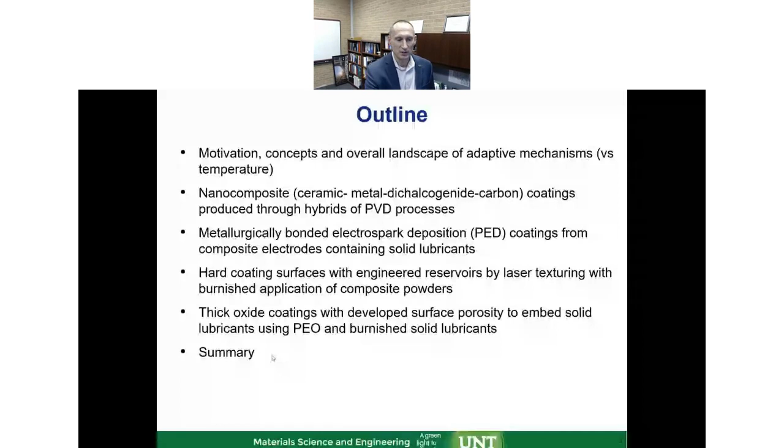Starting with the motivation, why do we need adaptive materials in tribology? Well, for people working in the industry, this is known better than anyone: machines have to operate in multiple operating environments. Aerospace, of course, can be extreme, but in tool industry and automotive, we always encounter conditions where you have to operate across multiple temperature ranges, multiple environments, high and low humidities, maybe some gases, as well as load and speed conditions, which leads to the challenge of how you pick the best tribological material. Specifically I'll be focusing on solid lubrication.

So when there's no liquid available, maybe at high temperature or other conditions, how do you pick the material? I like to use this chart, just to highlight that there are major groups here, and these are just examples. I like this chart because it clearly shows there's no one material which can work adequately well for any one of these environments. I put in humid air, dry nitrogen, vacuum, and 500 C air. Take molybdenum disulfide as an example: great for vacuum and dry nitrogen, very low friction, long endurance. As soon as you go to 350 C in air, it's oxidizing and failing.

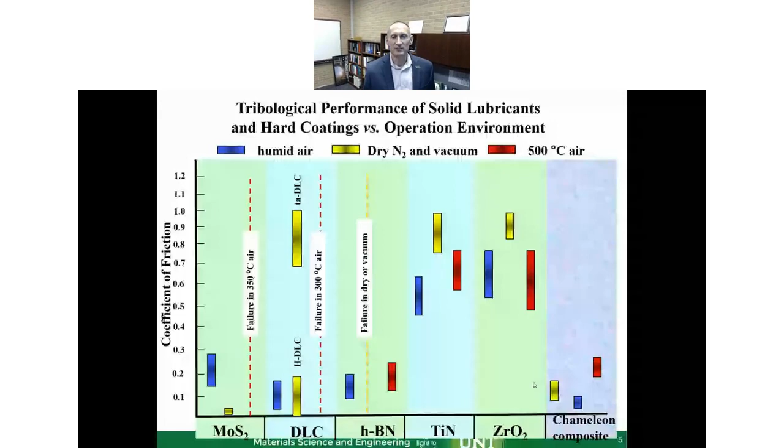And then the story repeats for any other material shown in here. We also have a group of hard coatings which are wear resistant but have high friction coefficients, so we'd like to be in here. And the answer is normally: okay, well, let's combine this together so they can work. The trick is then to make sure that on the surface during operation you have the right material, which comes to that chameleon concept, which I was working with my colleagues for many years trying to advocate.

That's the idea for adaptive lubrication. Basically, we want to engineer our coatings and our friction pair—sometimes we also need consideration of the counterpart and environment—so that in any conditions, reactions going on, whether temperature induced or friction induced, will end up forming the favorite material for lubrication. So we have the lowest friction material possible in the wear track in any condition. And if the condition changes, we want our material to adapt and change the surface in terms of chemistry, composition, and structure, so we have the right material that can provide low friction.

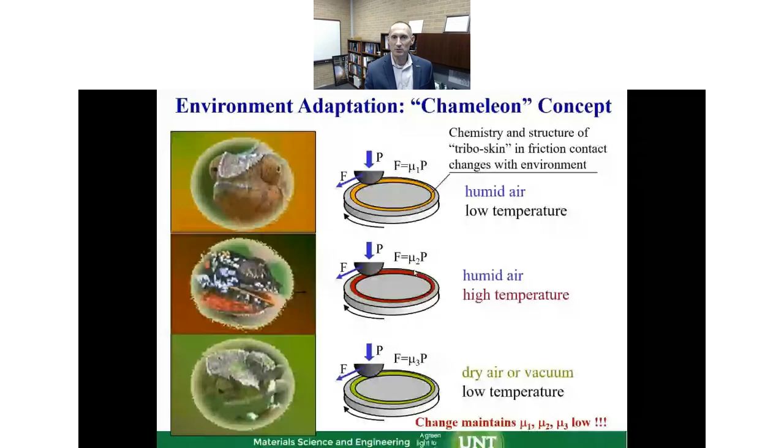All right, so this is kind of the concept. How can we do that? Well, we need to come up with the mechanism for how the materials can adapt, and what types of things we can use. So over the years, multiple mechanisms came out, and I'm sorting them out in this table, going by temperature, from low temperature all the way to 1000°C.

I will go through that today using examples. We'll talk about hexagonal solids such as transitional metal dichalcogenides and evolutions there. I probably, because of time, will skip the fullerenes and some other closed shell structures, which can buy additional capability, perhaps 100°C, because of the closed edges.

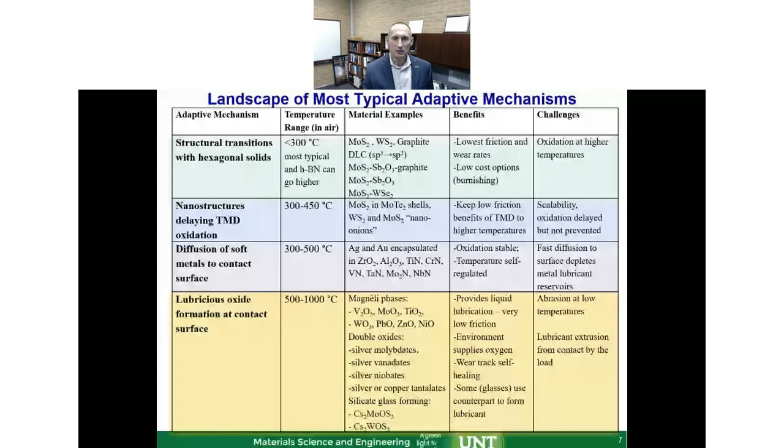I will highlight use of metals, which relies on softening and diffusion, and also highlight the high temperature end on oxides, where you specifically look at Magnéli phases and other binary oxides for lubrication. Those are mechanisms of complete adaptation, and we can talk about how we realize them using different techniques.

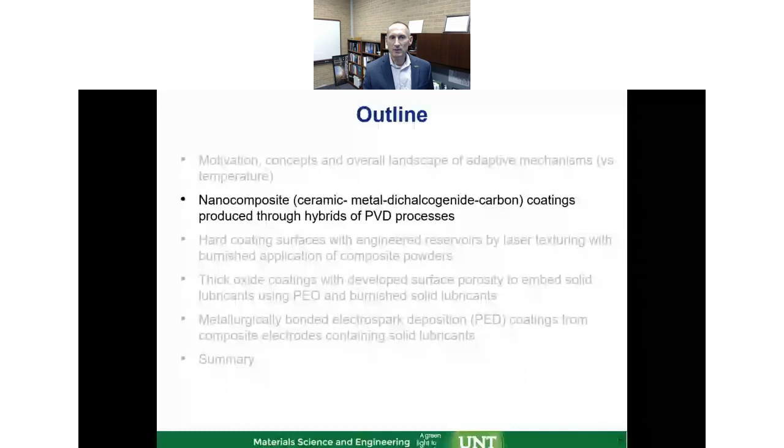All right, so let's talk about the first group of technologies: nano-composite coatings using PVD. I'll use this to highlight some of these mechanisms before showing other examples. One of the first successes we had in our group developing this type of material targeted the environmental change between humid and ambient conditions, where we have oxygen and air present, versus dry and vacuum conditions.

You can think about it as being between the Earth and, say, satellite use. People who design satellites always need something like this because you test on the ground first, and then once you launch, you operate in a vacuum environment. So you have at least one cycle, sometimes more, depending on how you test those things.

One of the materials we worked on at that time combined hard phases based on carbides with carbon materials such as DLC or fluorinated carbon for lubrication in a humid environment. We can also add molybdenum disulfide and tungsten disulfide for lubrication in a vacuum environment. It worked fairly well—I'll show you the example.

The challenge was how to get it to high temperature. What if you also need temperature cycling or a temperature rise? This is fairly challenging because we involve oxide formations and unrecoverable reactions at the surface, so you need to start thinking about those things.

In all of these designs, it's very crucial—and this is something I want to highlight—that you not only think about what's happening with the chameleon adaptation, but you need adequate load support, because you want your tribofilm to always be very thin and laying down on a hard supporting layer. This is something we all know from tribology books, and for many years people such as Alan Matthews and Ken Holmberg were advocating for this type of surface engineering. Don't forget about adhesion, because if nothing sticks to the substrate, especially during temperature cycling, that's not going to work.

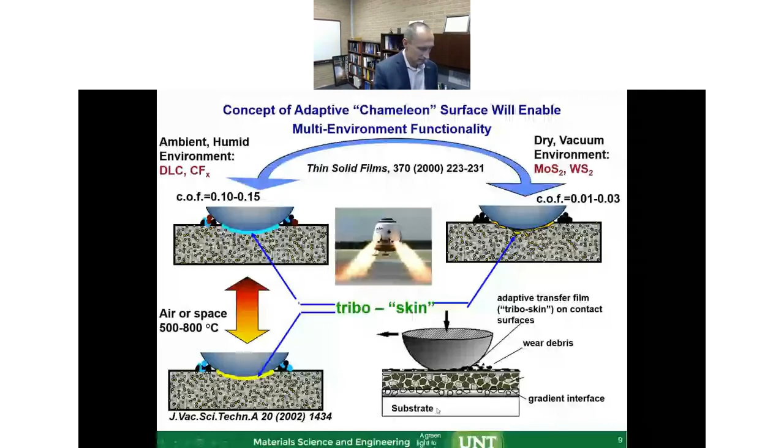All right, so let me move on. That's how we make those materials, the composites and the PVD coatings. We use a number of techniques, and I'm showing them in this chart, giving an example of some of the PVD tools we have available to us.

I listed here, highlighted in blue, the energies of the incoming deposited fluxes. This is something we use in PVD to our advantage. The reason is, when we combine multiple materials together, based on thermodynamics, their energies of formation are different. So if we only rely on substrate temperature, we run into a big problem, because some materials require high temperature synthesis, such as carbides or some of those oxides I will show.

And others cannot tolerate the high temperature. So carbon-based materials, or to some degree chalcogenides, will require a reduced temperature.

To overcome that, we're using high energy fluxes and these techniques. For example, in magnetron sputtering you can have a regular option, or a HiPIMS option, which can bump up the energy of the incoming flux by an order of magnitude. This compensates for the low temperature and drives the formation of normally high-temperature phases at reduced temperatures.

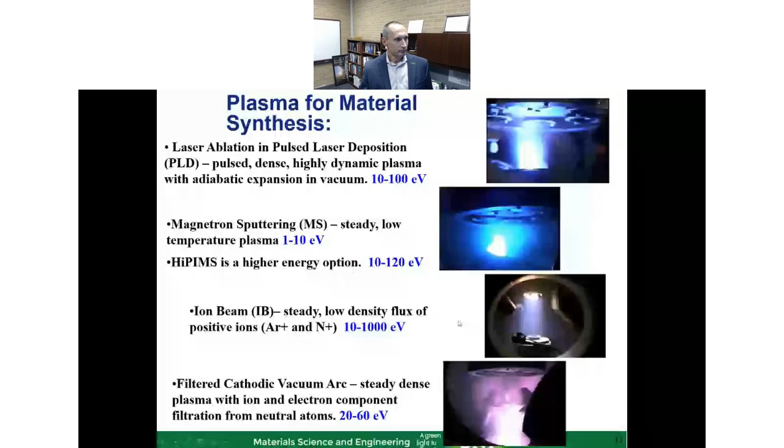All right, let's move on. So we want to combine this here, and one example I've worked on before is a combination of sputtering and pulsed laser deposition. You see the movie: the laser strikes on the bottom, the plume comes up, and the sputtering is on the sides.

Out of this arrangement, we have a combination of relatively high energy flux coming off the target, which is zirconium oxide, molybdenum disulfide, and graphite, and relatively low energy flux coming from the magnetron, which in this case provides gold as a component of the coating. In that movie, you can also have multiple magnetrons, or replace the PLD with an arc evaporation source, and have all the different combinations available — that's what we actually use.

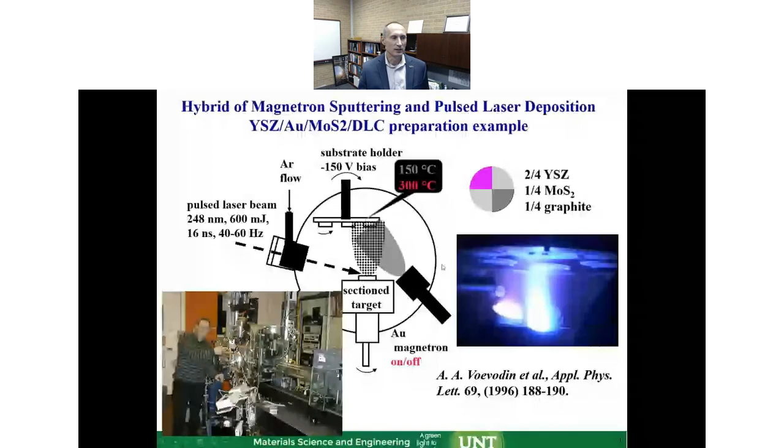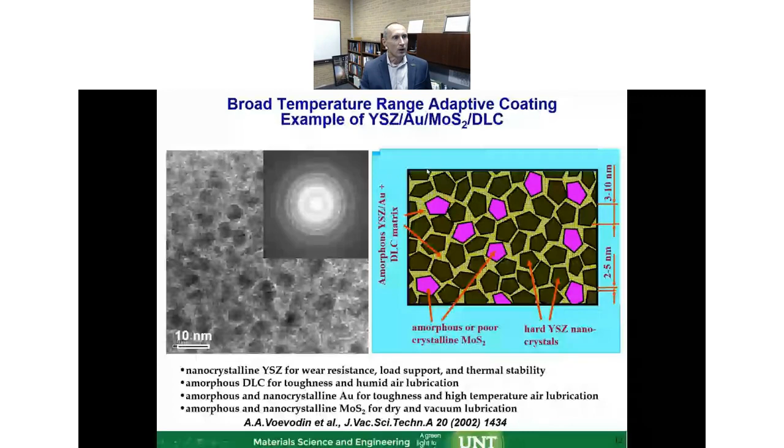This is the design for this material, which is ready to adapt and work in multiple environments. I'll show some examples over the presentation, but first let me focus on the low temperature performance of these adaptive coatings.

In this regard, let's look at the mechanisms we can use at 300°C and below. Here we talk about the chalcogenides and graphite — hexagonal boron nitride is somewhat of an exception because it can go to much higher temperatures. But let's focus on this range and the mechanisms involved.

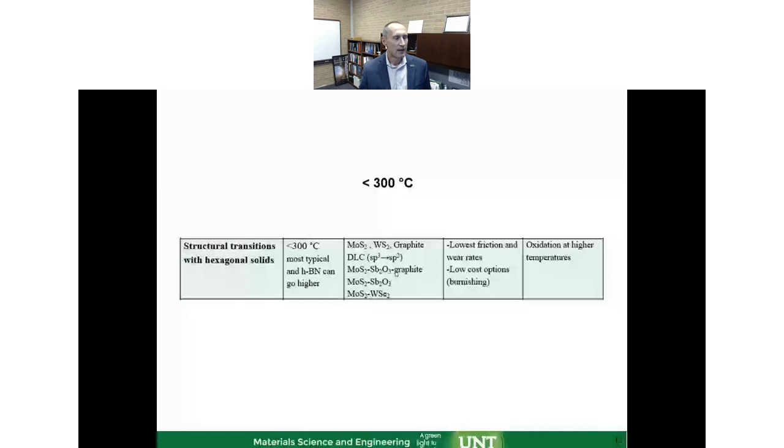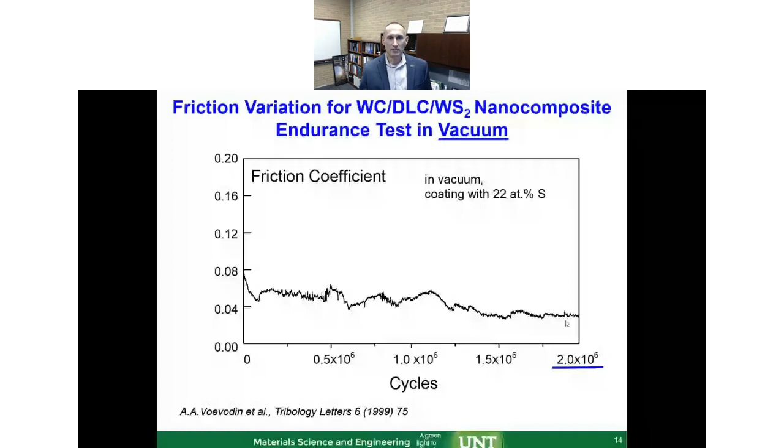So what's happening in terms of mechanism? There is tribofilm formation. This is from our own results, but I also have confirmation from other research groups, including the group of Dmitry Shtansky at the Moscow Steel and Alloy Institute.

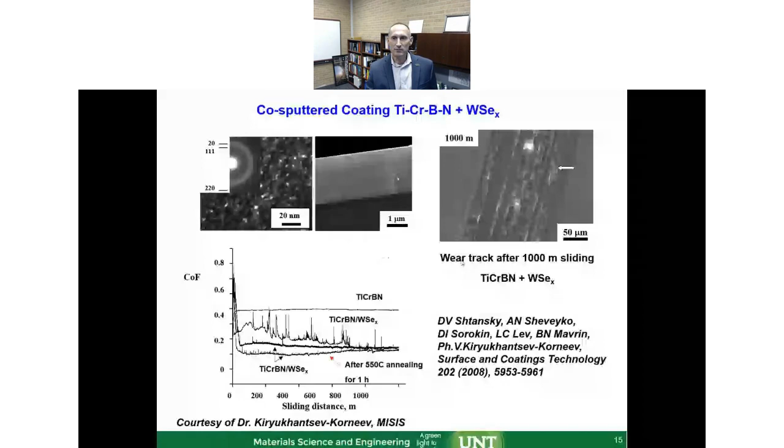All right, so let's look at the transfer film in much more detail.

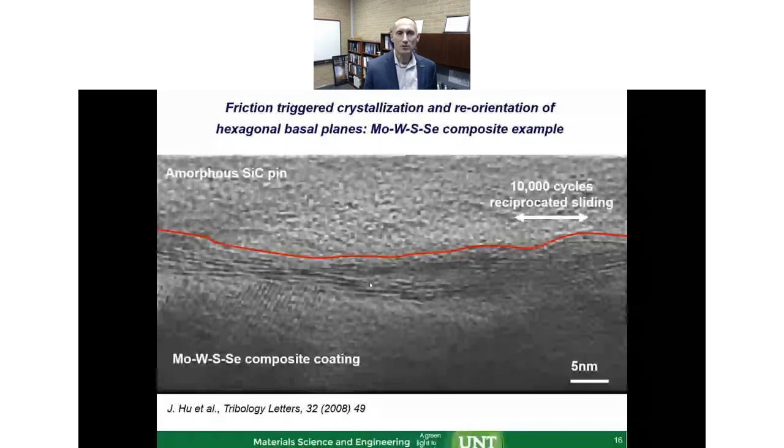And this is over 10,000 sliding cycles. After that, there's pretty much no wear, because of the reorientation of the randomly oriented grains, and the amorphous grains transform into the crystalline hexagonal phase. This is the adaptive mechanism for this chalcogenide, which is well known, and this is confirmation of how you can see it in real life.

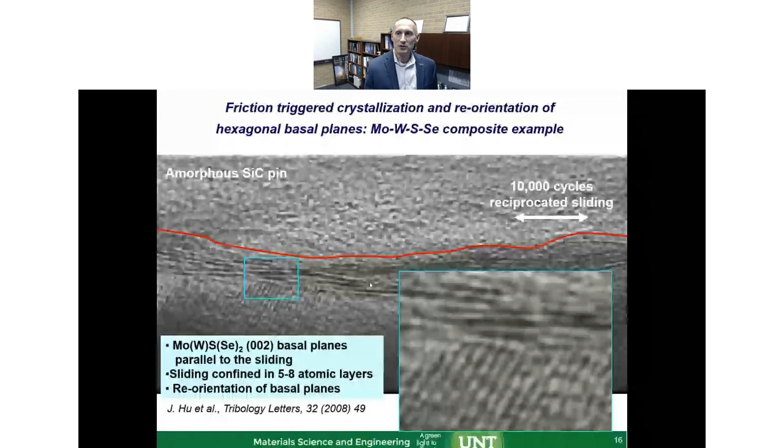All right, let me move on here to some demonstration of how this gets used. One of the very interesting and cool tests we did was with University of Florida, Greg Sawyer, Brandon Krick, and others, and Tribologix, who provided some of these coatings.

Air Force Research Laboratory, where I was working at the time, was doing the experiment for MISSE on the space station. To our knowledge, it was the only tribological in-situ test performed in orbit.

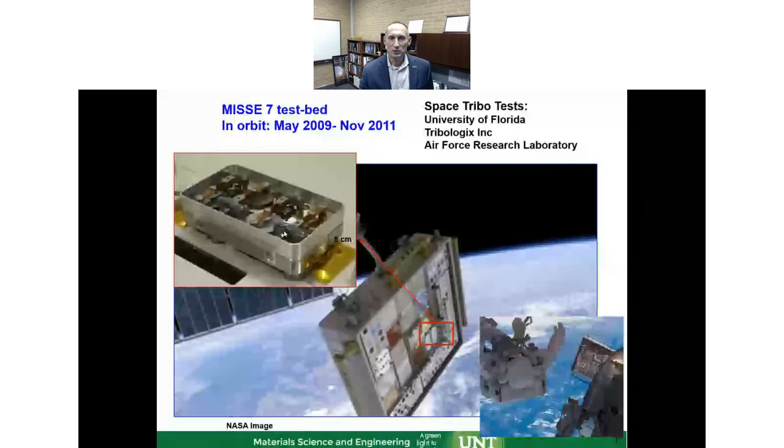What you see here are actually tribometers made in boxes, which the astronauts took out and put outside of the space station, in front and in back, for different exposure. They were left there while the tribometers worked and telemetered the data back to the ground, so we could see the friction coefficient in situ as it went around the globe. It was in orbit for this duration, a little longer than we expected. When it came back, we had the ability to analyze and compare before the flight and after the flight.

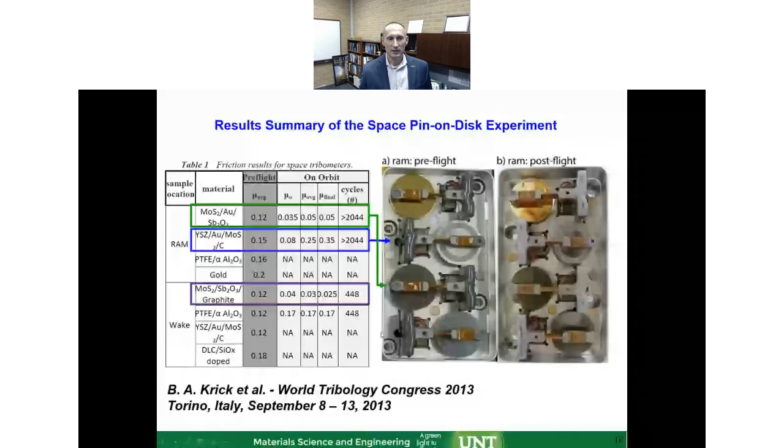We had a number of coatings there, including these chameleon coatings shown here, and the chameleon coating showed excellent performance across this space test. This was one of the things engineers in aerospace always ask: was it flown in space? And we can answer, yes, it was flown in space. It showed very good results compared to some of the baselines, and this is how you get it space qualified. Brandon Krick presented these results at the World Tribology Congress in 2013.

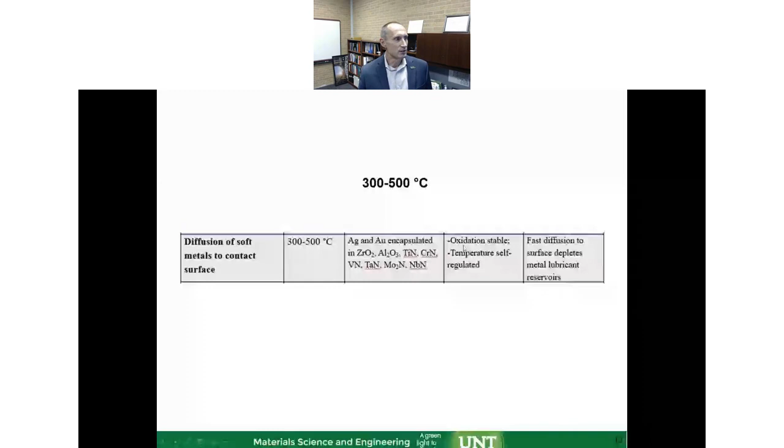Let me move now to the 300-500 degrees C range mechanism, where we talk about metals, because the chalcogenide will be oxidizing and won't really survive at this type of temperature. As I mentioned, maybe fullerene structures can extend it, but in general we now have to use different mechanisms. One of the mechanisms we can use is gold and silver encapsulated in matrices.

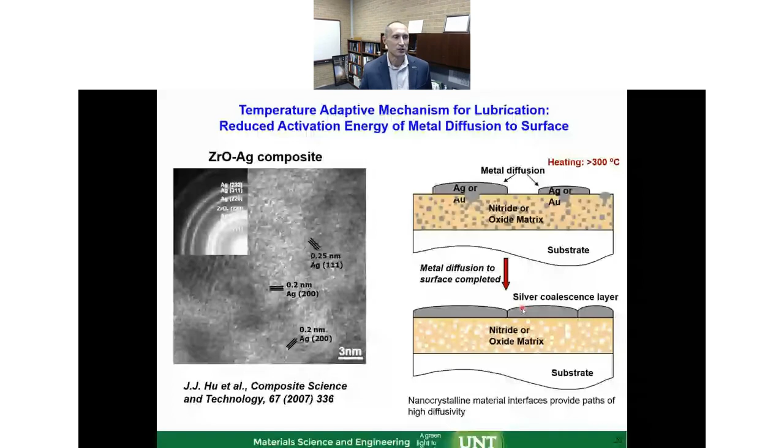This is an interesting concept: you take one of these temperature-stable oxides, such as zirconium oxide, or you can use nitrides, I'll show an example of nitrides too, and put the soft metals there, distributed between the grain boundaries, or even in the crystal lattice itself, in defective sites. Once you heat it, they are driven by surface energy minimization out of these oxides to the surface, and they coalesce there. Because they're soft, and because the temperature is now more than 300 C, they soften further and provide good lubrication in that condition.

So to show you an example here, this is with zirconium oxide and gold, pardon, this should be silver. You can see here the gold part, the gold grains showing up on the surface, and they are smeared, of course, in the tribological track, providing this lubrication shown here.

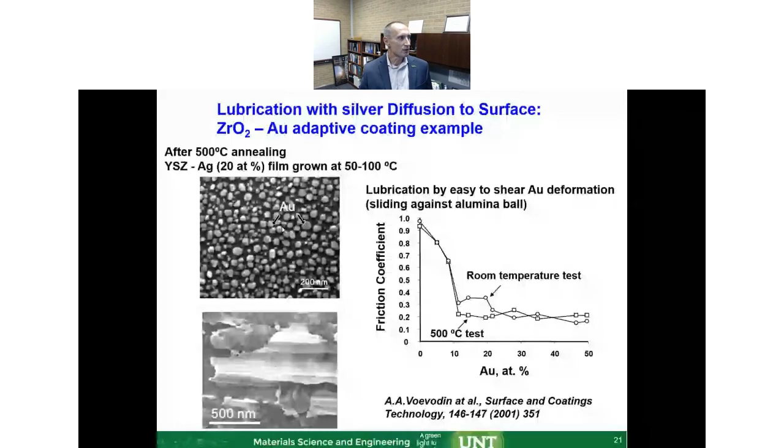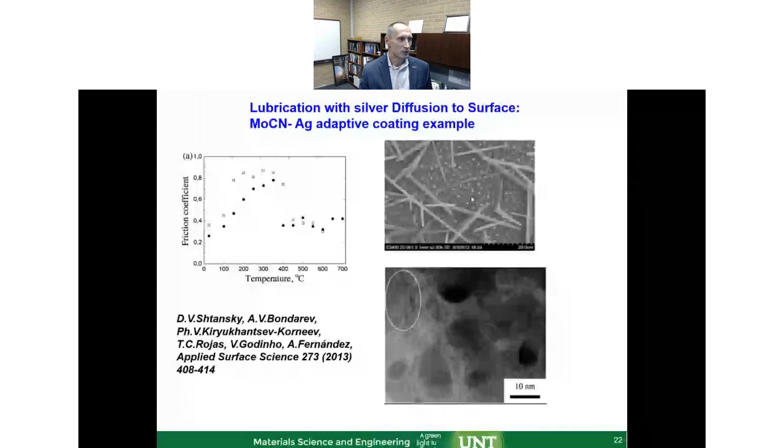That concept is equally applied if you replace the zirconia for a different matrix and replace gold for silver. This is, for example, work by Dmitry Shtansky again from the Moscow Institute of Steel and Alloys, where they're using a molybdenum carbonitride coating with silver as an addition. You can see here, right around 400 C, the mechanism gets triggered, and the silver comes up on the surface and provides friction reduction, very similar to what was shown in the previous chart. So it's working very nicely from that perspective.

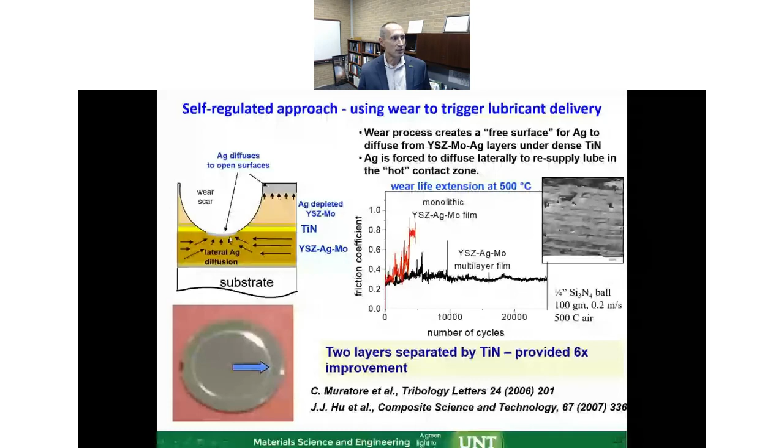The problem with that mechanism is that it diffuses sometimes too fast, especially as temperature increases toward 500 C—the diffusion is so fast that all the material gets depleted very quickly on the surface. So one way to address that is to put a diffusion barrier layer, such as titanium nitride, which will restrict the diffusion. Just putting in this titanium nitride diffusion barrier layer, splitting it in half, gives us an extension of wear life for many thousands more sliding cycles, because it restricts the diffusion toward just the wear track needed, using this subsurface diffusion mechanism.

All right, so now we've done this. Of course, you can also do more engineering—get more of these layers with diffusion barrier separation—and now you can start talking about thermal cycling, or at least a few thermal cycles available, and try to maintain the friction coefficient low as you go between, in this case, 500 and 25 C, through this adaptive mechanism.

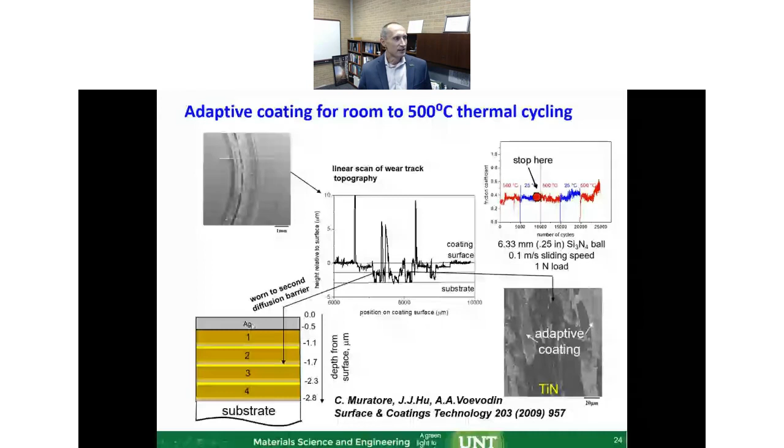Now we're covering low temperature and mid temperature. Let's go to the high temperature. If we go higher than 500 C, the silver will get out very quickly, even with diffusion barriers, and we need something else. Now we're moving into the world of oxides. At 500 C in air, the chalcogenides, carbon, or even the soft metals become too soft to work, so they're not a very enduring mechanism. So we need the oxide-based chemistry working, because then we're not fighting nature—oxide naturally forms.

So the trick is how we can guide this oxide formation to the ones we need. Which ones do we need? Well, we want ones that are stable at this temperature and have low friction—meaning low shear, or low shear modulus, oxides. Magnéli phases or defective oxides, like vanadium pentoxide or molybdenum trioxide, some listed here, are among the choices. People working in the tool industry well know the benefit of adding vanadium to hard coatings from that perspective.

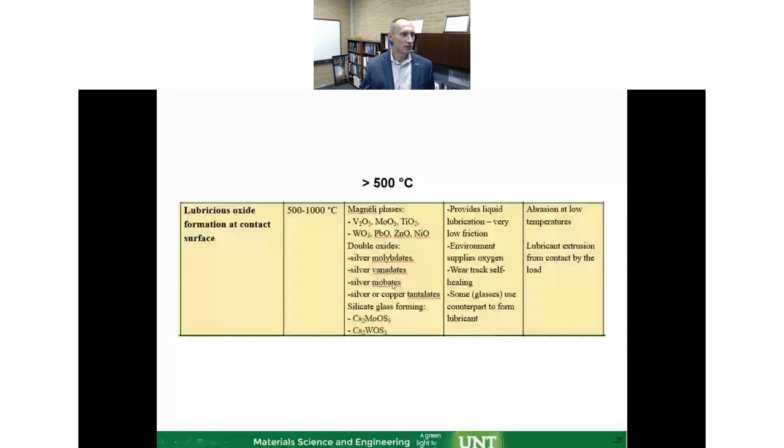Then you can look at double oxides, which can help reduce the temperature at which these mechanisms get tripped. Here we can also rely on modeling tools to help us, because that material domain space became very large very quickly, with multiple transition metals and oxide structures available, and now adding double oxides extends it even further. This is work from my good collaborator and friend in Aachen, Jochen Schneider, working with Tom Reeswinkel and Dennis Music.

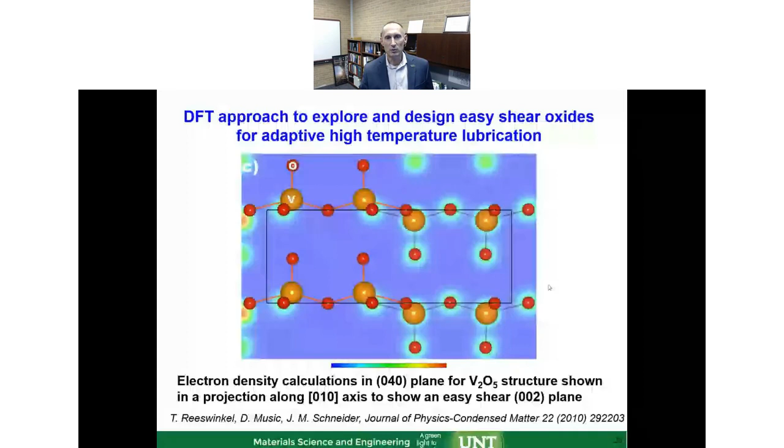In 2010 we did calculations on some of these double oxides, trying to locate the low shear modulus directions in these oxides that lead to lubrication. We looked at the electron density populations, trying to identify where this electron density is lower, along which planes, which can then lead to calculations of cohesive energy, leading to shear modulus estimations and understanding which ones can provide lubrication.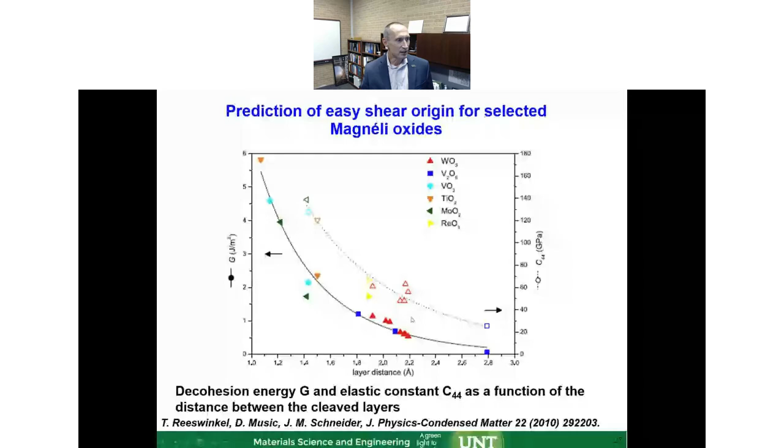So the results are shown here. The graph shows, for example, the decohesion energy and the C44 term—basically the shear modulus on one side and the cohesion on the other. These are different oxides that were run, and the winner here, in terms of lowest possible shear modulus, is vanadium pentoxide. Well, we already knew that from the tool industry, but this showed us that yes, we can use these tools and look at all these other mechanisms and predict it.

To take it further, because that was 2010, this was pushed further, and this is work coming out of another good friend and long-time collaborator of mine, Dr.

Samir Aouadi, who is at University of North Texas, worked with me. He's also working with a very brilliant grad student, now a brilliant engineer at General Electric, Darcy Stone. They looked into double oxides.

Silver vanadate is one example here, along with silver molybdates. We did calculations, looking at energies and electron distributions, and also at where metallic bonding exists rather than covalent or ionic bonding, so you can identify this type of oxide.

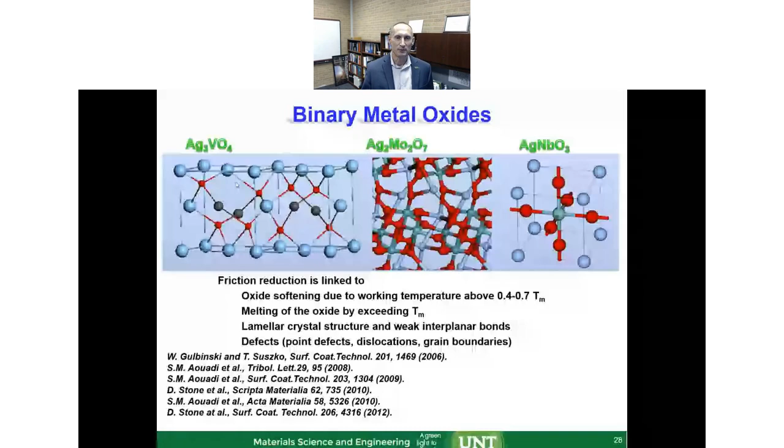Silver vanadate came out as one of the winners, so experiments were set up to track it. The problem was that this forms at a fairly high temperature, while at moderate temperature a different oxide forms. So we needed a tool to detect it.

With Dr. Chris Muratore, now at University of Dayton—at the time we worked together at the Air Force Research Lab—we designed an in-situ tribometer. We had brilliant engineers helping out, John Bolton was one of them, and we constructed the Unico machine, an in-situ Raman setup for very high temperatures.

We're talking about 1,000 degrees C, bringing the probe all the way in while keeping it optically intact, meaning no distortion as the temperature ramps up and down, taking the signal out through fiber optic to the Renishaw Raman. Now we can track as we spin, without stopping the spinning, and as we heat, without stopping the heating. With this, we can see what type of oxide forms on our surfaces.

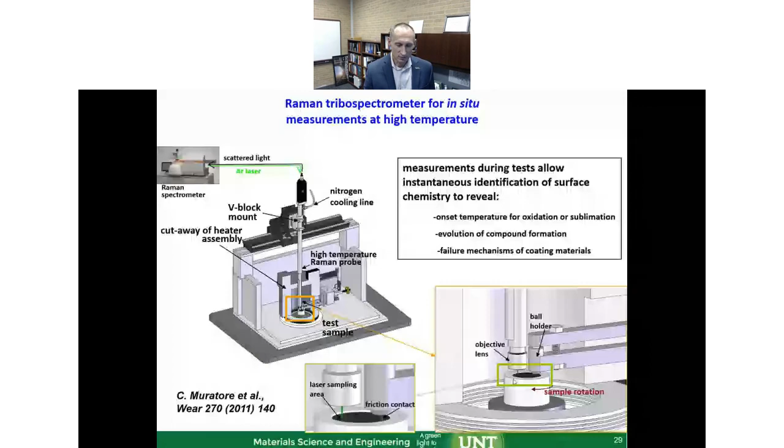To my knowledge, this is the only apparatus of its type that was constructed. It's now rebuilt at the University of North Texas, and we're using it. I'll show you some other examples.

Going back to silver vanadate, you'll see here as we ramp up the temperature—this is the sample temperature curve—we go all the way to 700 C in this case. Right at this green point, we commit the test and start looking at oxides, particularly tracking the formation of silver vanadate, which starts appearing through the developed peaks.

Now we have the answer for why the friction is low—there's the friction trace here, because we do have this double oxide. When we cool it down and do the post-mortem analysis at room temperature, that peak gets masked by another oxide, like vanadium pentoxide showing up here. So it's not clearly identifiable.

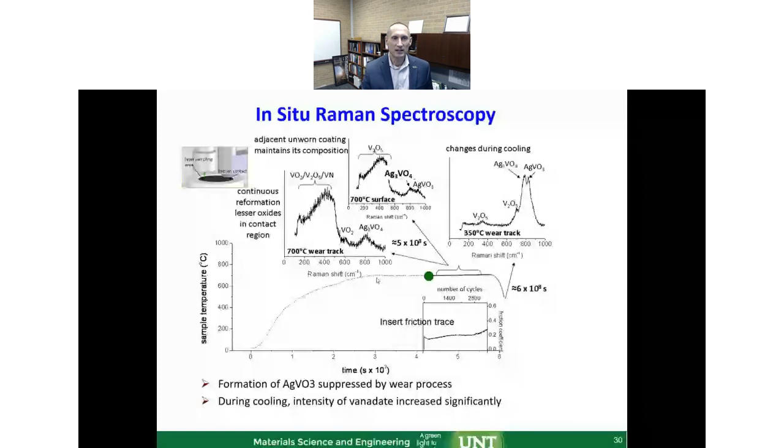There's another oxide showing up here too, as you can see in-situ, so the in-situ presence is very clear. This is the power of this technique: it tells us exactly what forms at this temperature, rather than guessing after cooling because you form a different oxide.

So I showed you 300 C moderate temperature and about 500 C. Can we combine this all together? Yes, we can.

This comes back to the structure we have: zirconium oxides, silver, molybdenum disulfide. These are the data points at different temperatures—room temperature, 300 C, 500 C, 700 C—showing different mechanisms at different temperatures, but it keeps the friction in a good range throughout.

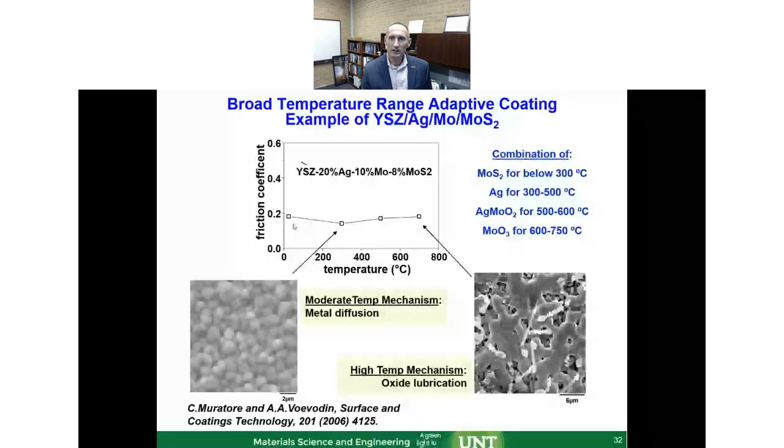So it is working, and I think I'm done talking about those PVD coatings. I want to switch to different highlights and different engineering materials.

Let's show that we can also create such adaptive coatings with other methods—we're not just bound to PVD. PVD is a great option, I like it, and I've worked with it for many years, but there are also other alternatives that may sometimes provide even better results from a different perspective.

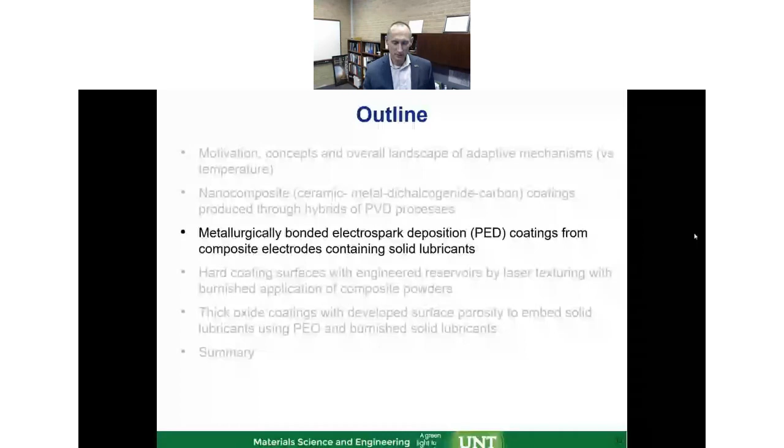For example, the metallurgically bonded electrospark deposition technique for composite coatings—this is a rapidly emerging method. This comes from Professor Evgeny Levashov at MISIS, who uses self-propagating high-temperature synthesis to create composite targets, materials, and electrodes. You can see some examples here, just a few, and the list keeps growing.

Every year they develop multiples of this technique here. It's a self-propagating synthesis, as shown here, where you can combine very high temperature materials together in a dense form.

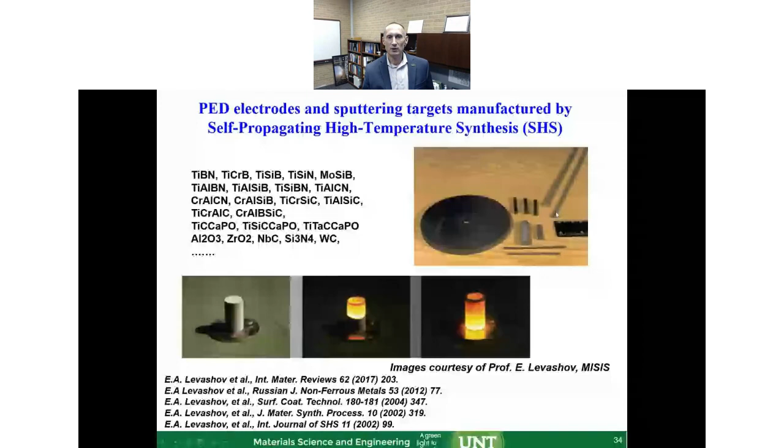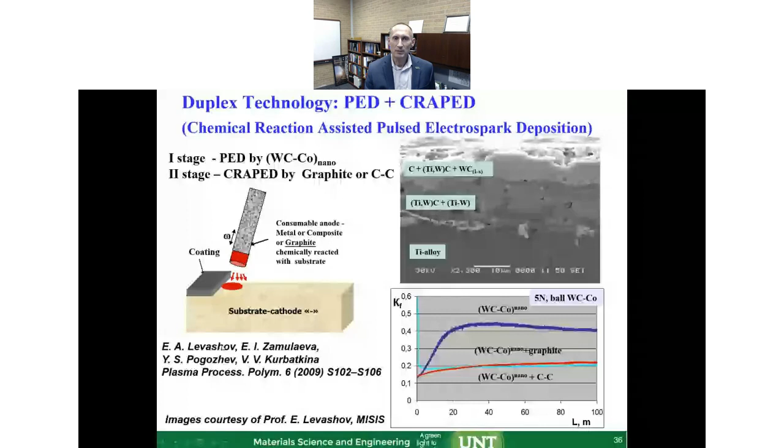I hope in the future we also see electrodes with tungsten disulfide and others, so we can produce other lubricants using this method. This is an up-and-coming method still being developed. You can find more of this work listed on these charts. But let me move on further.

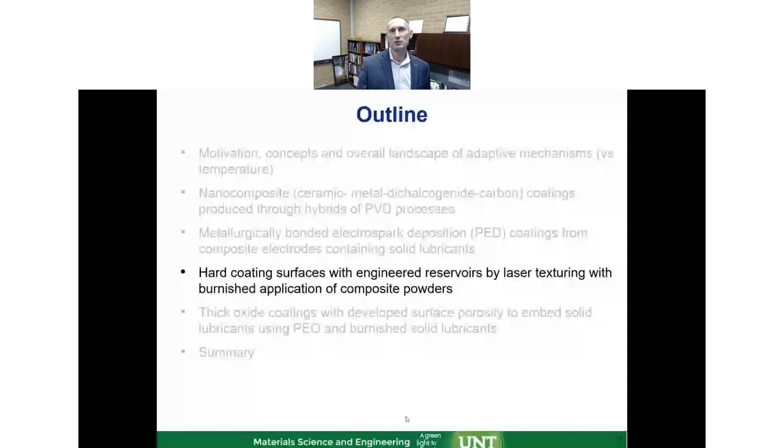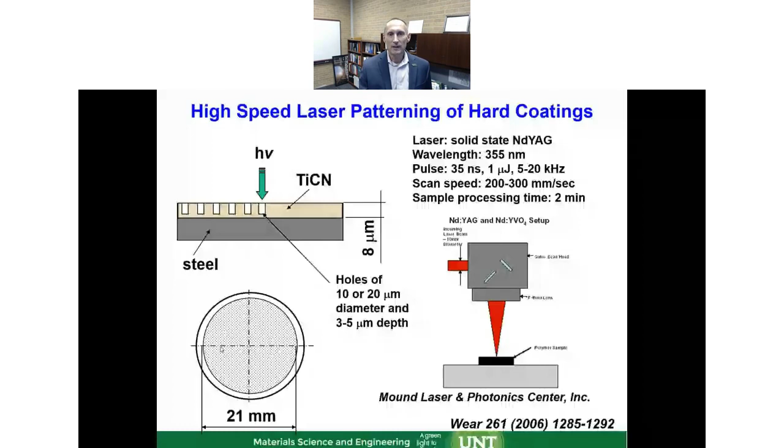Another example I want to highlight is whether we can use other methods. Laser texturing is a popular method where you can modify the surface to create a different morphology, which can form reservoirs for solid lubricants. It's very simple: you take any hard coating, in this case titanium carbon nitride, and do laser drilling with a high-speed motion stage and a pulsed laser. In a matter of minutes, you can engineer something like this: a bunch of dimples created on the surface that serve as reservoirs, where you can control the diameter and depth of the dimples.

Now we put chameleon coatings on the surface, based on carbon, molybdenum disulfide, and antimony oxide. This chameleon coating was developed by Jeff Zabinski, Andy Korenyi-Both, and Tribologix. I had the chance to work with them, combining the laser texturing with this chameleon coating, and we ran tests in humid and dry conditions. You can see the dimples and the partial coverage of these dimples here.

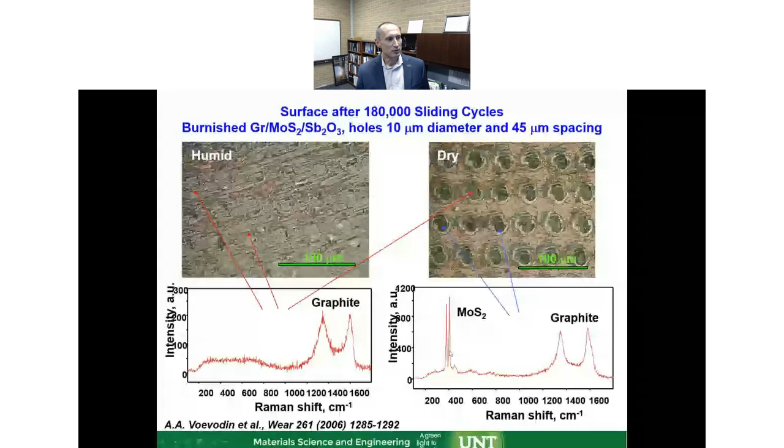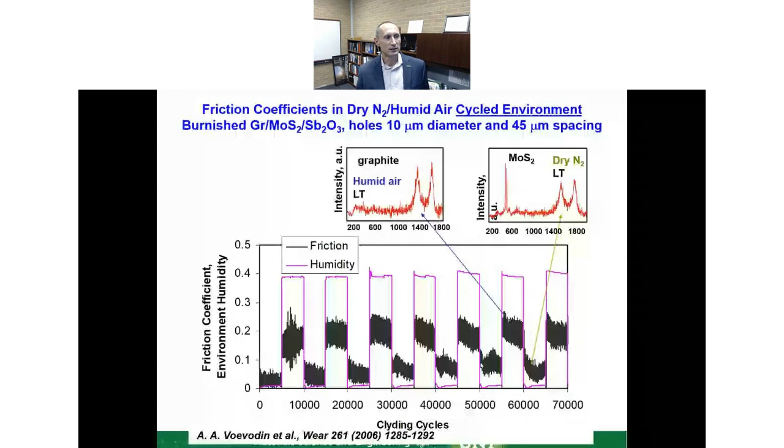Using Raman techniques, we confirmed that in a humid environment, graphite provides the lubrication. Once you change the environment to dry, you start seeing molybdenum disulfide instead. Molybdenum disulfide oxidizes in humidity, so it diminishes there. To confirm this happens back and forth, we ran cyclic humidity tests, with humidity going high then low, and friction recovering every time due to lubrication by molybdenum disulfide in dry conditions, or by graphite in moist conditions. We confirmed with Raman techniques that the actual adaptation had occurred.

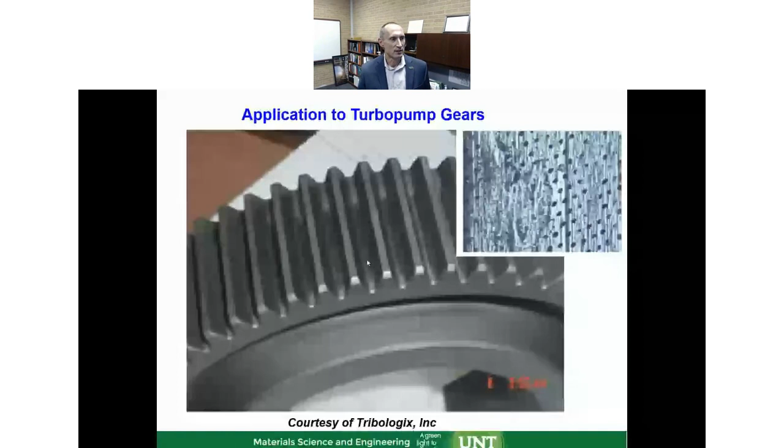This worked very nicely, and my industry partners, in this example from Tribologix, applied it to a gear intended to work in low temperature cryogenic conditions. You can see the dimpled surfaces on the gear and the coverage here, and that's working very nicely for the turbo pumps.

Moving to the final one, I want to present a thick oxide coating based on porosity with embedded solid lubricants, using plasma electrolytic oxidation as a process to create this.

For those not familiar with plasma electrolytic oxidation, as a quick overview: you need an electrolytic bath with potassium silicate solutions, using aluminum or titanium or similar valve materials to make a part, and put it inside the electrolyte. You use high voltage pulses to break the electrolyte, initiating micro arc sparking on the surface. You can see the glowing of this micro arc.

So you have aluminum from the part, and silicon in the electrolyte, resulting in a very dense aluminum silicon oxide coating with alpha alumina phases, gamma alumina phases, and some amorphous phases mixed in there.

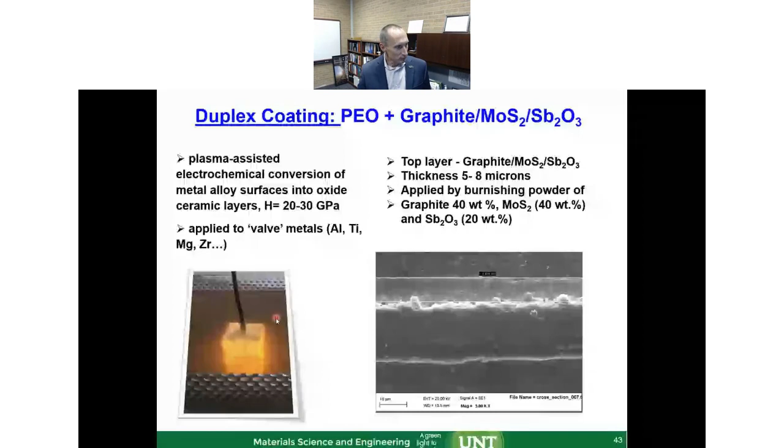Alexei Yerokhin at University of Manchester, with whom I had the chance of working for many years, is one of the process developers. He published several review papers on this, which I'll draw to your attention. He helped with some of these coatings using his technique.

Alexei works with multiple sources that can generate different frequencies, and the frequency is very important for this particular process.

This is an example from his work: a low frequency of 50 hertz leads to a porous, thicker coating with well-developed morphology and porosity, especially in outer layers. If you increase the frequency to 2.5 kilohertz, the material becomes much denser with much less developed porosity. By regulating the frequency, you can tune between dense and porous materials.

This is what became attractive for adaptive lubrication. But before I go there, this frequency is also in the audible range, so you can actually hear it. When Alexei was working on this with his longtime collaborator Evgeny Parfenov from Ufa Aviation Technical University—both brilliant minds—they said, let's play around with the sound of these frequencies.

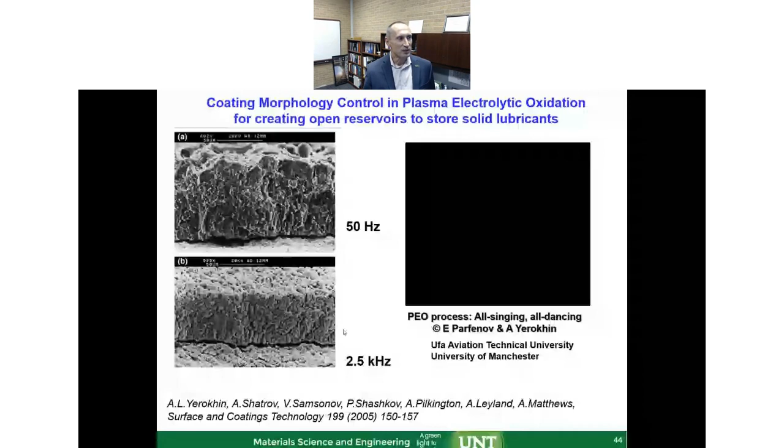As a demonstration, they made a nice movie with sound. I hope you can see it—I'm going to play it for you in a moment. All the sound is made by the process itself, by regulating the frequency during the process, and you can see and hear how the process works.

Oops, sorry. Technical issues here.

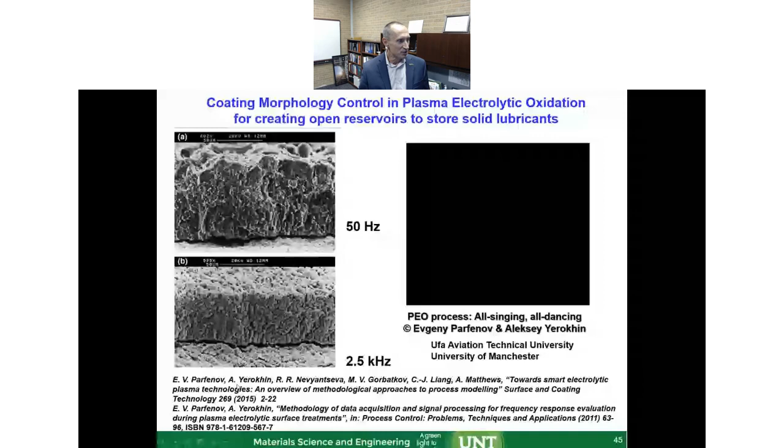So you can see that—what you saw is a part made with a tune corresponding to the little Yellow Submarine song. You can find more in the works by Evgeny Parfenov and Aleksey Yerokhin, where they discuss in detail how this frequency can be used to monitor the process as well as to control the film density and porosity.

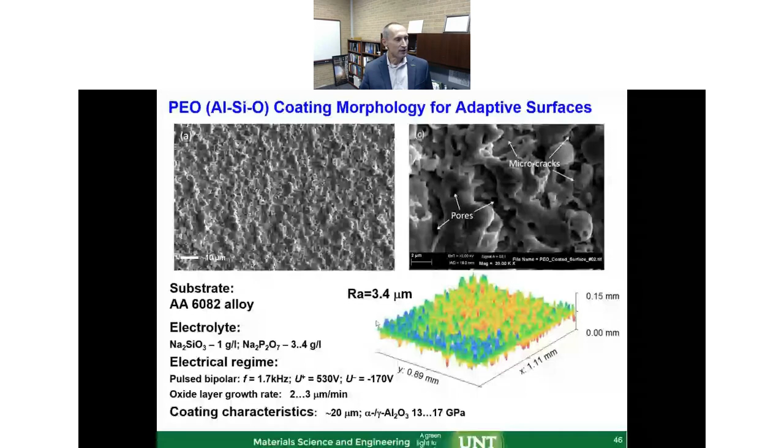But meanwhile, let me move on. In our case, we use this highly porous morphology, specifically tuning the process to open these pores so we can use them as reservoirs for adaptive lubricant. Those electrolytes and regimes for making the coatings result in well-developed roughness, and a coating made of alpha, gamma alumina, with some silicates in there as well.

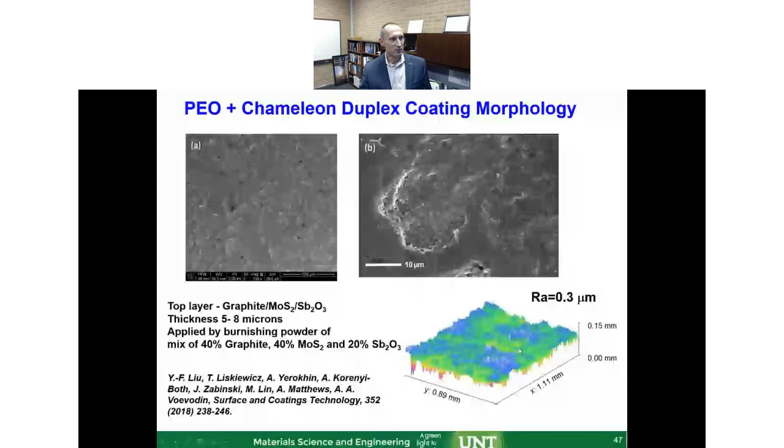On top of that coating, we burnish the chameleon composition, and it covers nicely and is well adhered. Of course, the roughness drops down because now it's all smeared on the surface.

Now we come back to testing those, and we first tested in reciprocated sliding wear testing. Here's calibration work done with Tomasz Liskiewicz—at that time he was at Leeds University and had a machine where you can apply load using reciprocated motion. We're looking at the stick-slip transition.

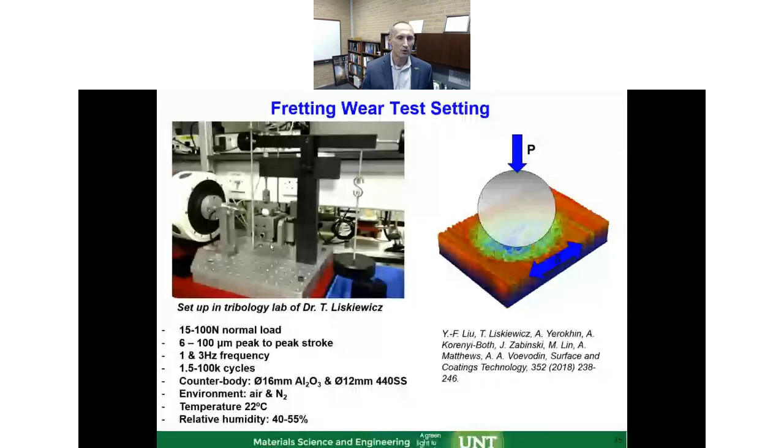We also look at gross slip regimes when we have wear—I'll show you some of the gross slip regimes in a moment. I just want to mention that the stick-slip transition was also drastically reduced for this chameleon composition. But in gross slip, if we have the plasma electrolytic oxidizing coating without any chameleon, the friction coefficient is high, as expected, since it's a hard ceramic.

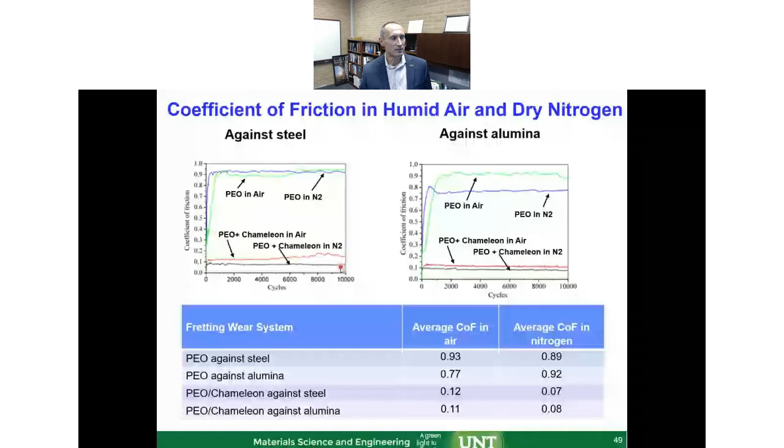As soon as you put it on top, the friction drops down very low, both against steel and against alumina. In dry nitrogen, it gets even lower and much more enduring because molybdenum disulfide kicks in and works in there. This is the room temperature result.

Most recently, we're showing results from my lab at the University of North Texas, where we have this in-situ Raman tool, originally developed at the Air Force Research Lab and now reconstructed at UNT. It's a very unique tool. You're looking right inside this oven where all the action is. This is the loading pin, and this is the Raman probe, which is taken out. Agha Shirani, a brilliant graduate student about to graduate, is working on these materials.

He was collecting data during the friction run using PEO and the graphite, disulfide, antimony chameleon composition at 300°C, collecting Raman spectra periodically through the cycles. We can see the evolution of molybdenum disulfide, antimony trioxide, and also the graphite. Nothing really changed much on the graphite; it didn't seem to show much change.

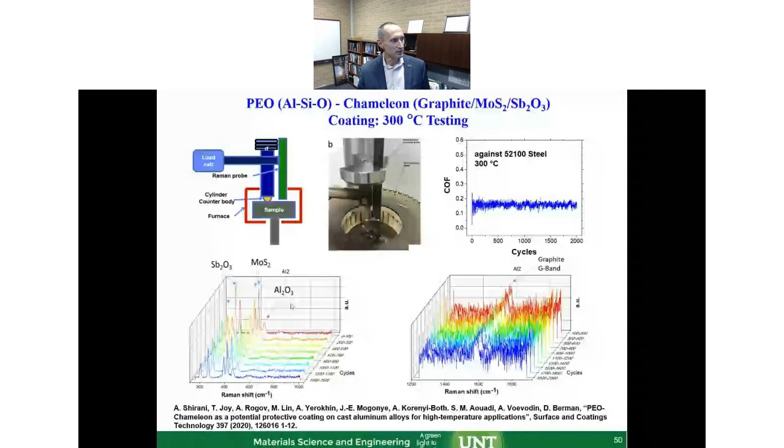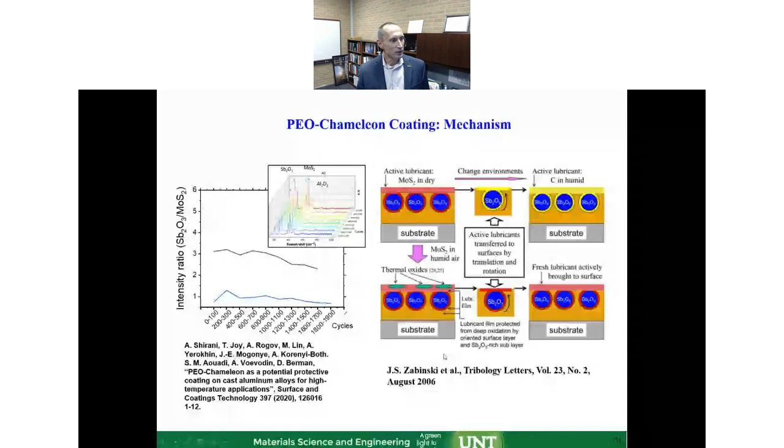To answer that question, we go back to the literature 14 years ago. Jeff Zabinski was looking at these chameleon coating compositions, working with this composition using transmission electron microscopy, looking at post-mortem analysis, not in situ. They formulated a mechanism where antimony trioxide rotates and dislodges during friction, moving downward and leaving a surface richer in molybdenum disulfide. So 14 years later, we confirmed that mechanism shown here.

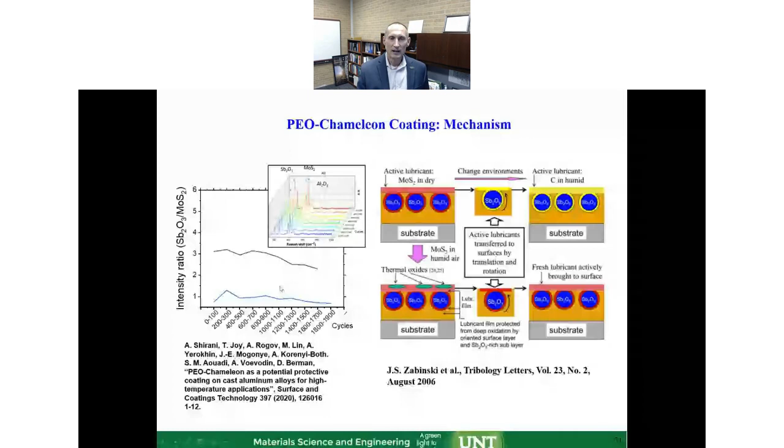But there's more to the story, because we also see that not only does antimony trioxide drop down, but the wear rate and friction drop with increasing temperature. Normally we see the reverse - you increase the temperature, you get higher wear rate. That particular combination was puzzling because the wear rate was actually dropping.

Of course, we couldn't go above 300°C since it's an aluminum substrate, which starts getting softer after that temperature and can't support the load. So the friction drops to ultra-low at 300°C because we think we're driving the moisture out, allowing the molybdenum disulfide to slide very efficiently, almost like in dry conditions. But what's happening with wear?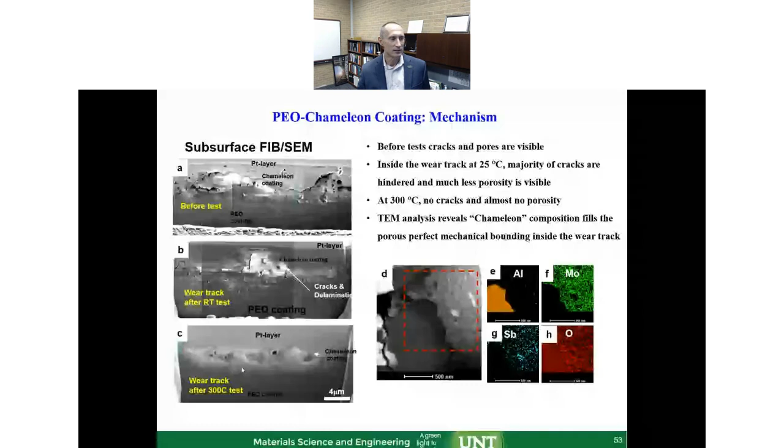I hope to give you a good overview of the major concepts for adaptive surfaces. The main idea here is very straightforward: you need reservoirs filled with temperature-sensitive, environment-reactive phases, and you want to put them in hard and oxidation-resistant matrices.

Then you want to have a balance of hard and soft through all these coatings, because you always have abrasion, and this is normally so for the endurance. Finally, because you want to put this into practical application, cost matters. So balance performance with cost, choose the technology you like, thickness versus the fineness of the finishing. You can think about PVD, laser texturing, PEO, PED, and others—the list is growing.

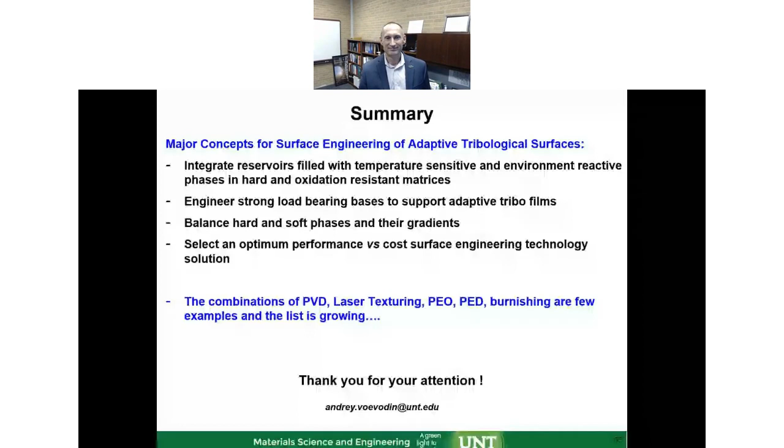Exciting research and excellent talk. Thank you for that.

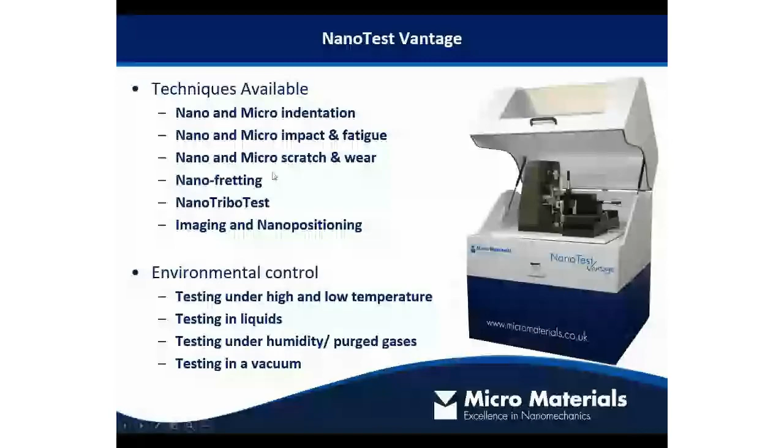First of all, thank you very much to Andrey for this talk. I'd just like to say a few words about the nano and microscale reliability testing techniques we can offer at Micro Materials. Some of you are familiar with the testing instruments we make here, a multifunctional mechanical characterization tool. I'd like to focus on three functions today: nano and microscale wear, nano scratch, and nano fretting tests.

So why do we do nano and microscale tribology work? As you're all aware, if we take two sliding surfaces face to face, our nominal contact area actually comprises many millions of small asperity contacts, at which there are very high localized pressures. It's these localized high pressure points which often lead to the onset of tribological failure. So if we can use a very small probe in a scratch test or a wear test to simulate one of these asperity contacts, we can start to learn about the fundamental origin of tribo failure.

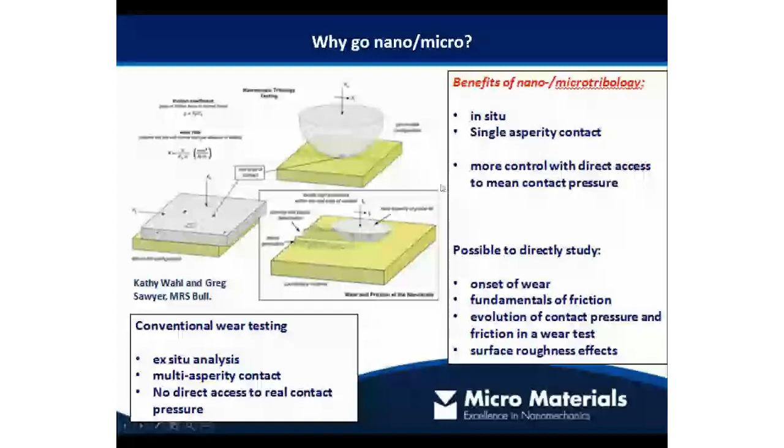What do we control or measure in nano and microscale tribology tests? We can control the contact pressure by controlling load and contact geometry. We can control how we apply the load, ramping it or keeping it constant. We can control sliding velocity and sliding distance, and we can change the material pair that is sliding. Often we use a diamond probe, but that isn't fixed—we could use a steel probe or whatever material you wanted. We can also change the environment, as we've just seen, environment is very important in tribo systems.

We usually measure the depth of the probe into the material to get a view of the total deformation, including plastic deformation itself, friction acting on the test probe, acoustic emission, and electrical current flow are other things we can monitor in addition to these standard metrics.

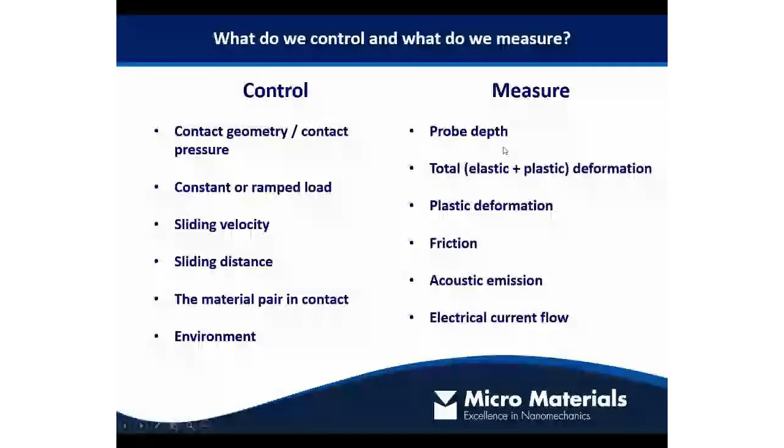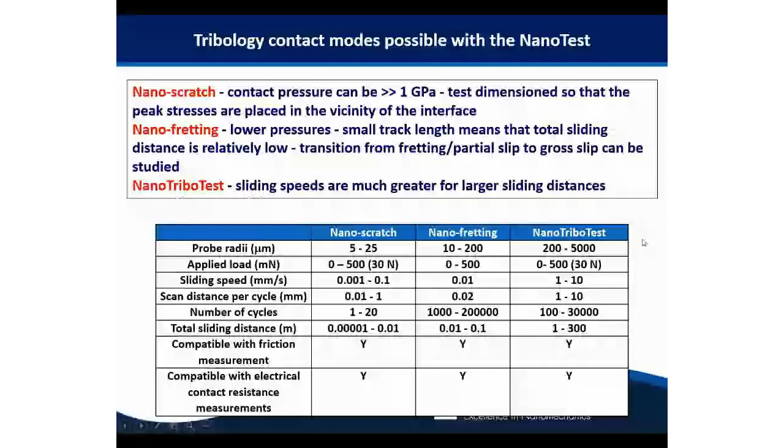So there are three techniques: nano scratch, nano fretting, and nano tribo test. As I said, they cover a range of contact conditions, trying to encompass as many real world scenarios as possible. Here's a summary of how they compare. Basically, nano scratch tends to be a single pass test over a short distance, and at the other end of the scale, the nano tribo test offers many passes over a longer distance. The nano fretting test is in between those two.

For scratch and wear testing, typically what we do is profile the sample surface first—here's our surface roughness, depth versus distance. Then we apply our scratch load: we scan along, return to the beginning, and apply the scratch load. At a certain point, the depth suddenly increases. Something's happened—we don't know exactly what, but our instrument tells us something's happened.

We then do another topography scan along the scratch path, and we see this big step here, which we saw no evidence of in our loaded pass. What this tells us straight away is that there's some kind of tensile failure taking place in this coating-substrate system—that's an adhesive failure. And as we just saw, adhesion of coatings is very important.

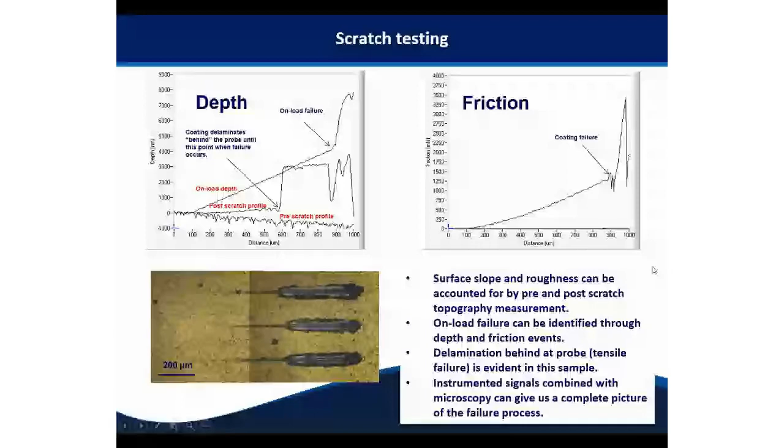So here's the corresponding microscopy, and you can see this delaminated region. So as well as depth, we also measure friction, and friction can be very useful as it can give us an earlier indication of early stages of failure.

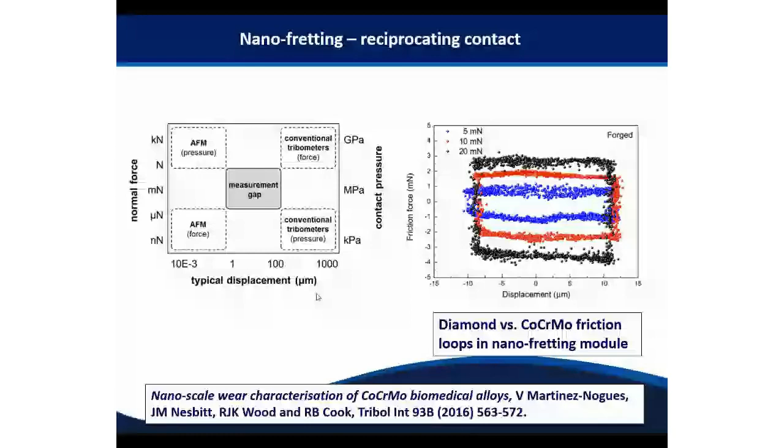Nano fretting works over a much shorter scan distance usually. It's in between AFM and conventional tribometers, so we can actually cross the boundary from static to sliding friction with this test. As you can see, some work was done here at Southampton University, where we can actually extract even micron scale friction loops from this test as well.

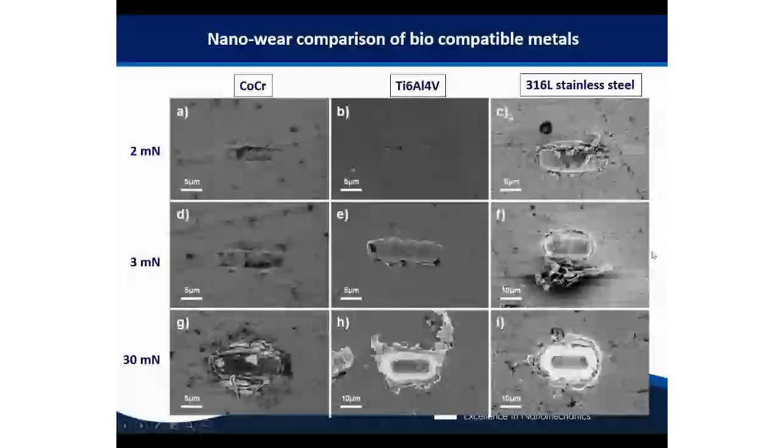So here's some example work on some biomedical alloys, and really what we're looking at here is the evolution of fretting damage that takes place in these materials at various different contact loads. The contact geometry is the same in all cases, but as you can see, the way in which the debris at that interface evolves differs between the materials. So one thing that may look very good at a low level of loading may not be quite so good at a higher level of loading.

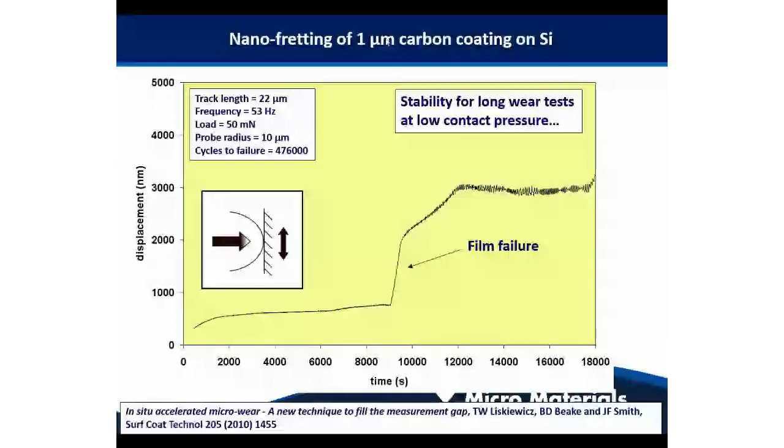In terms of instrumented test data, what we tend to look at is displacement, which means depth of the probe into the sample as a function of time or cycle number. What tends to typify or give us an indication that a failure has occurred is a sudden increase in the depth. Here we see an increase of about 1.5 microns. This is a 1 micron coating on a silicon wafer, so there's a very clear failure event taking place here.

The nano-tribo test, as with all of these techniques, utilizes the same nanotest loading head as all of our testing methodologies. Essentially, it's a linear reciprocating tribometer test. The sample is oscillated backwards and forwards over a user-specified distance, which can be up to 40 millimeters. Friction is measured continuously, and we can measure depth data as well. So we can change the contact geometry—it's very flexible. In this case, we've got a very big 6 millimeter diameter ball in place.

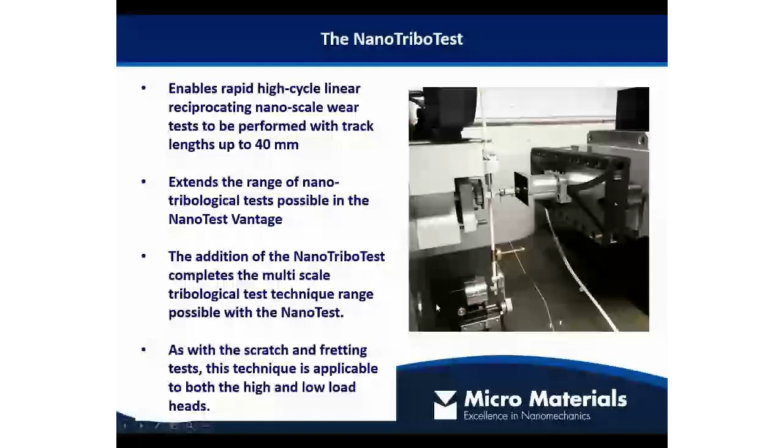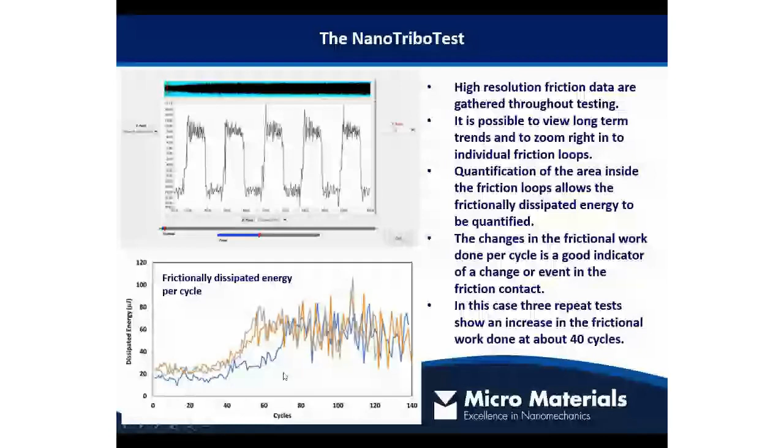So here's some example data—again, our familiar kind of reciprocating tribometer friction versus sliding distance charts. We can convert our friction data into frictionally dissipated energy per cycle. With these particular systems, we see about 40 cycles at a pretty constant level of dissipation, then a ramp up, which signifies some significant change in that tribo system, possibly the onset of a complete failure. So that's just a very, very quick overview of the things we can do there.